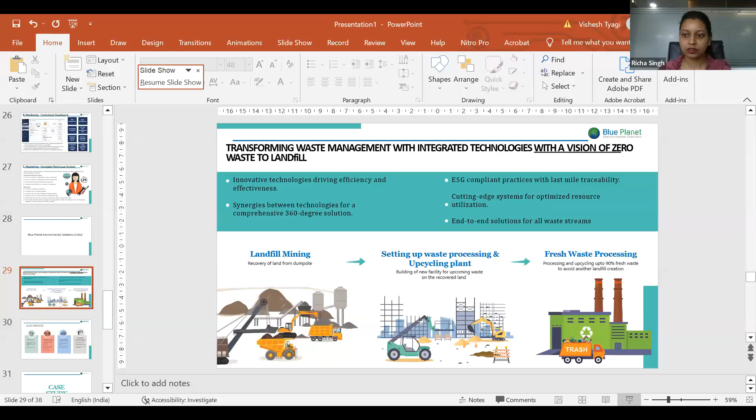So I'd like to share... is it visible? Yes. So today I would like to start with the topic of integrated waste management approach.

As we know, India as a country generates a huge amount of waste every year. According to one report, we generate around 62 million tons of waste, of which only 43 million tons is collected. The rest, around 19 million tons, is not yet collected. Of the collected waste, only around 12 million tons is processed or treated. The remainder, around 31 million tons, is simply dumped into landfills. This is the situation we face every year.

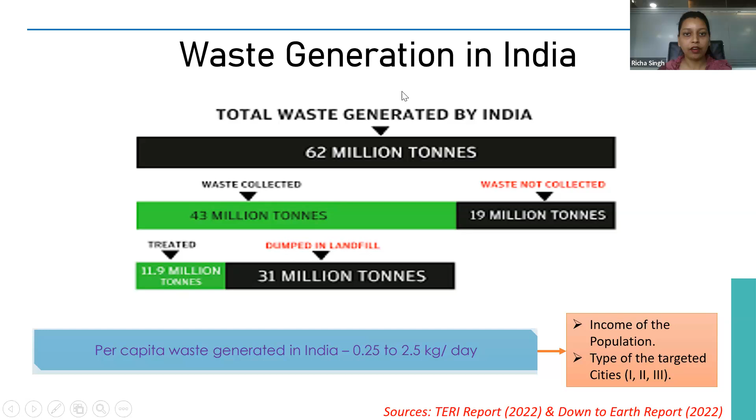According to the resources, the per capita waste generation in India is around 0.25 to 2.5 kg per day. This basically depends on the income of the targeted population or the type of targeted cities, like Tier 1, Tier 2, or Tier 3. So from here you can imagine how much waste we are generating every year, and this could be a huge problem.

The major problems we can identify here are waste collection and waste disposal. In terms of challenges in waste collection, there is a lack of participation in waste segregation at the source due to low awareness. This lack of awareness is the main cause of poor waste collection.

The second issue is the low waste collection fee—the wages we provide to collectors are very low, so they also don't participate much since awareness is not there. Collectors are also not aware of what is hazardous and how to segregate it. Other challenges include lack of infrastructure, lack of human resources, and insufficient budget for solid waste management.

There is also a limitation of suitable technologies—we are not aware of which technologies are suitable for collecting hazardous waste or different types of waste. Additionally, there is a lack of institutions and policy for solid waste management. Even though we have the Solid Waste Management Rules 2016, awareness about how to implement it is still lacking among common people.

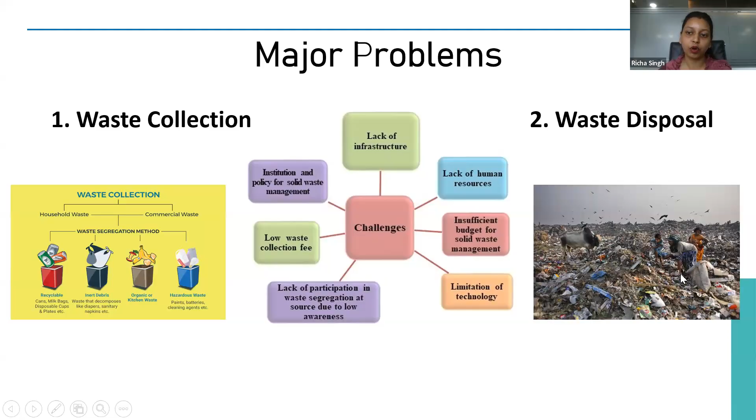So the objectives we are going to discuss today are how to reduce the adverse impact of this waste on the environment.

In both respects, how to collect it and how to dispose it, and in between, how to process it efficiently. Second objective is to consider material flow in the society. Third, reduction in solid waste quantity, how to reduce the solid waste quantity. Then reuse of material, and the last is recovery of material and energy.

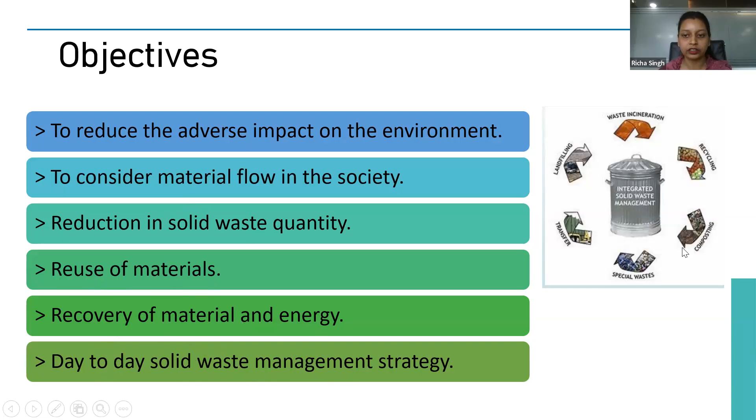Day-to-day solid waste management strategy looks at how we can make a strategy to manage our waste. Especially here I am discussing solid waste. These are the categories we can divide our solid waste into based on the material type, whether it is organic or inorganic material, or biodegradable, non-biodegradable. On the basis of material composition or type, we can segregate and categorize solid waste.

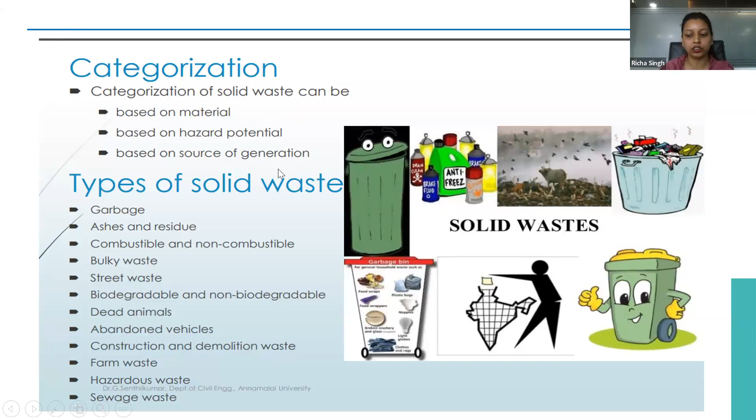Then based on the hazardous potential, we can categorize solid waste. Third is the source of generation. What is the source of generation? Here you can see the sources of solid waste: residential, commercial, industrial, municipal services, institutional, agriculture, hospital.

In the picture, you can see a huge amount of solid waste is generated from the residential part, around 68%. Commercial also contributes a huge amount, that is 14%. Municipal services, education, agriculture together contribute around 12%. Industrial waste separately is 2%. Hospitals and clinics, which come under hazardous waste, contribute around 4%.

So what we have to remember here is that the quantity, quality, and composition of waste depends on the source of waste generation.

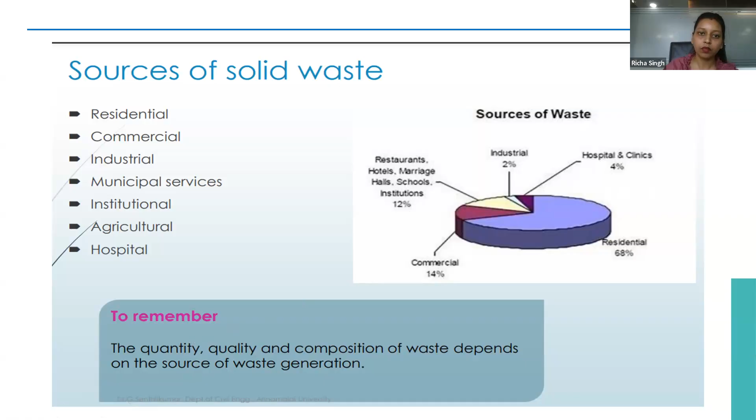The composition of municipal solid waste in typical Indian cities: here we can see the composition of MSW in India. Generally, around 40% is food or garden waste, which we can call organic waste. The major part of organic waste, food and garden waste, is 40%.

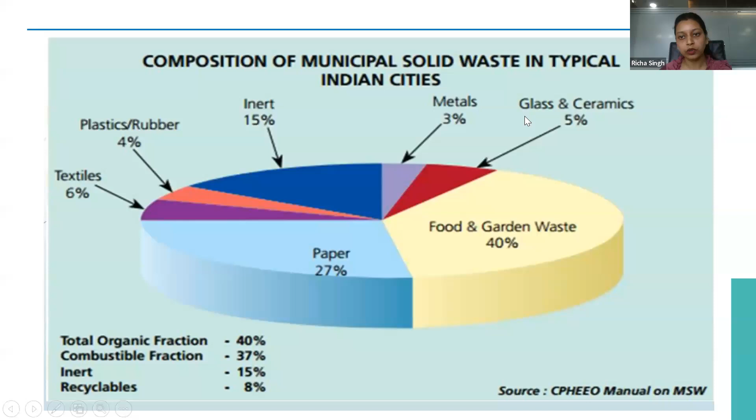So how do we utilize this with an efficient, proposed methodology? We can say the Solid Waste Management Rules 2016 released by our Government of India.

This is the basic structure of the methodology. We collect the waste from different sources. Under the second level, we segregate it according to characterization, like biodegradable, non-biodegradable, and others. Then the third level in this methodology is transportation, which is also considered a big part of this integrated waste management methodology - how to transport it.

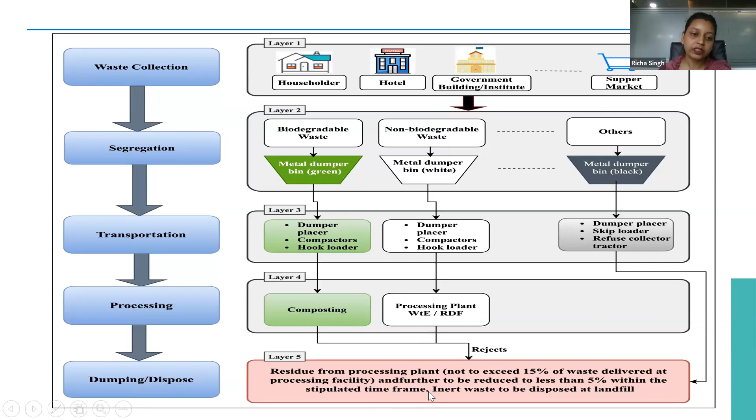Some solid waste is bigger in size, and we have to reduce it, so pre-processing is included, and transportation is made efficient at this stage itself. Then the fourth layer of methodology is processing - how to process that waste. For biodegradable waste, composting is proposed as one way. Other processing like waste-to-energy methods are also there, so we can go for that too. And then how to dump it in an efficient, scientific manner, so that it could be sustainable for our environment.

Then I will discuss each and every aspect of it, like integration, end-to-end solid waste management - how we can provide this end-to-end solution to the solid waste generated in our environment, in our society. We can see here one approach of integration in a commercial area or residential area.

The waste is always generated, we can collect it, and mechanically or manually segregate it into different types and categorize it into organic waste, some dry waste which is combustible in nature, and non-recyclable waste, which we can utilize for some process. Plastic waste is also one part of solid waste, so we can utilize it and convert it through some process into fuel. The remaining is inert waste, some part of which we can recycle and utilize for different useful products.

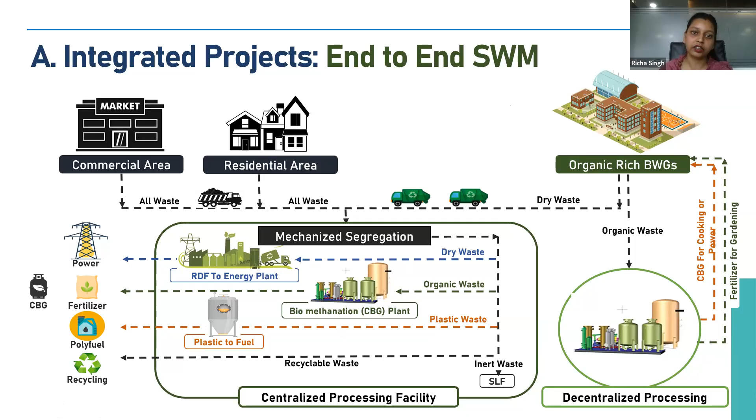The second part is integrated landfill mining. Here we can say that the collection of waste in the landfills is where we can apply this integrated waste management strategy, so we can directly turn these landfills into a good and nice place for the environment, where sustainability can exist.

If we get some landfill place, the first part of this methodology is pre-assessment and analysis of the dump site. We have to analyze and characterize this dump site: what is the composition of the waste, and what are the different types of waste we can segregate from this.

Then, how we can stabilize this waste. Here you can see this dump site is divided into several rows, which is for the aeration we provide to it, to manage the landfills accordingly.

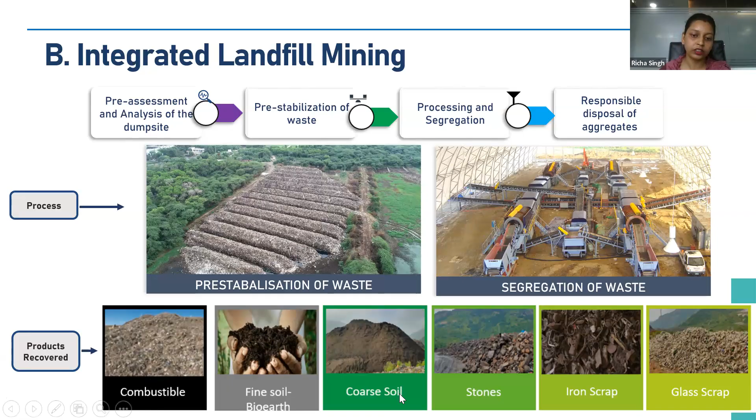Here you can see these are the processes, and here we can recover important and valuable products like combustibles, fine soil, bioearth, coarse soil, stones, iron scrap, glass scrap, etc. These are the processing technologies.

First, when we collect it, we call it a material recovery facility. After segregation, every type of material we get is segregated, and we plan the recovery of each and every resource of waste we got. So we can say it's a material recovery facility. Here you can see that organic waste, dry recyclable waste, plastic non-recyclable waste, hazardous waste, and inert waste we get, and this segregation could be manual or mechanized.

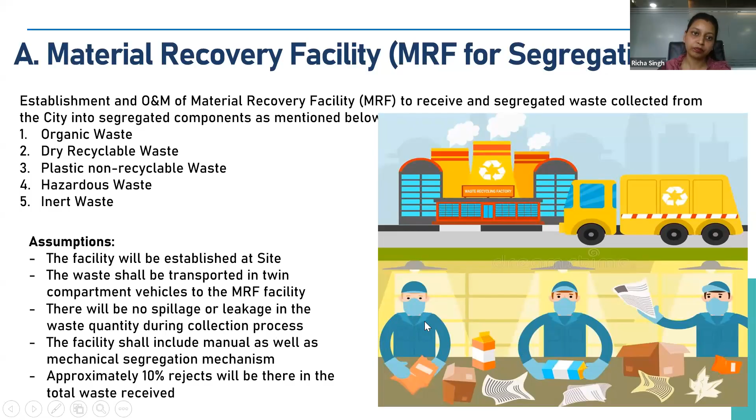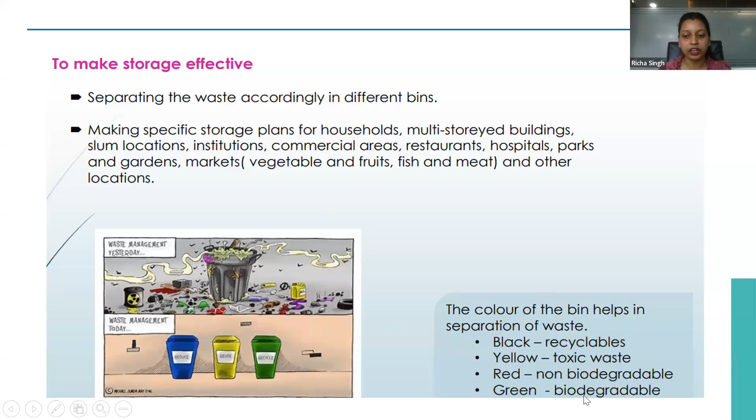As we go to a higher capacity of waste collection, we can opt for the mechanical part. These are the segregation or storage, effective storage strategies we can start. The suggested effective storage strategy is to place separate bins for different types of waste at the source. Different colors of bins can help us in separation of waste: black for recyclables, yellow for toxic waste, red for non-biodegradable, green for biodegradable.

Then, as I explained before, when we get mixed waste, what is the mechanism of processing this mixed waste and producing valuable products from it? This is the mechanism: mixed waste we segregate into organic, RDF, plastic, recycled, and inerts.

Organic, through biomethanation technology, we convert into CBG or biofertilizer. RDF, from dry waste, goes through thermochemical processes and is converted into power, and the residue of it is also utilized in different channels. I will explain that later.

Then third is plastics, which is also converted into a kind of fuel we call polyfuel, which works as a liquid fuel like gasoline and diesel. The process is thermocatalytic depolymerization, TCD. Then the fourth part of this mixed waste could be recyclable waste, which we can recycle through different processes and convert into valuable products.

Then fifth is inert, which is disposed to the SLF, sanitary landfills. The important thing here is that through these products, we can generate revenue, and this we call a circular economy, where each and every part of the waste is utilized and provides us a source of revenue generation. This is a good example of circular economy, an integrated and sustainable approach of utilizing all the waste into an opportunity.

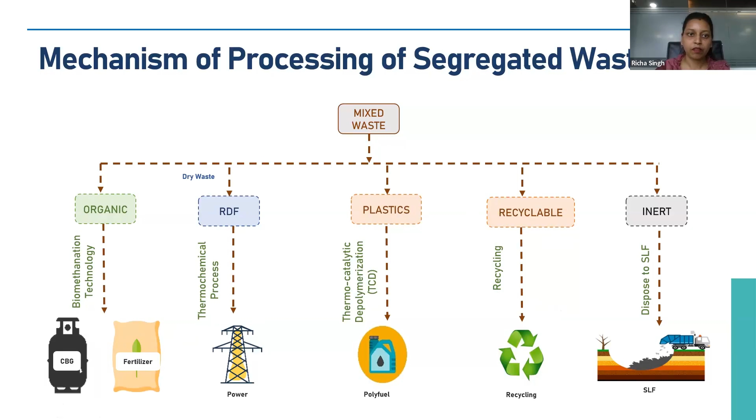So this is one example of a centralized processing facility, where we can place all the technologies I have discussed before and make it a centralized waste processing facility. Here we can utilize all types of waste using different types of technologies.

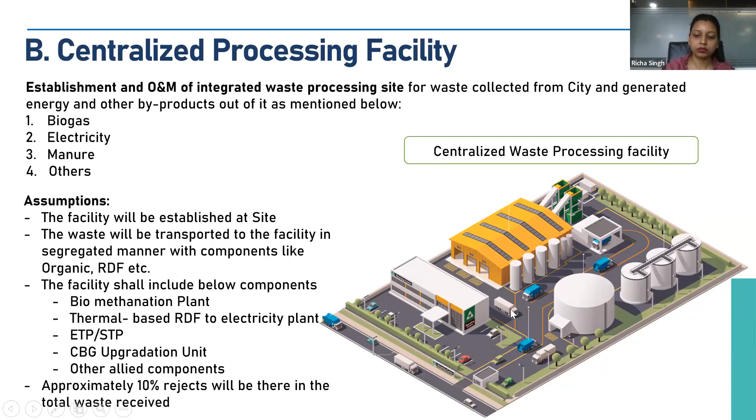As a product in several applications, like vehicular fuel, power generation, and cooking purposes. Another valuable byproduct is the digestate, which we can further process and convert into organic manure. The remaining part we can process into ETP treated water for green zones.

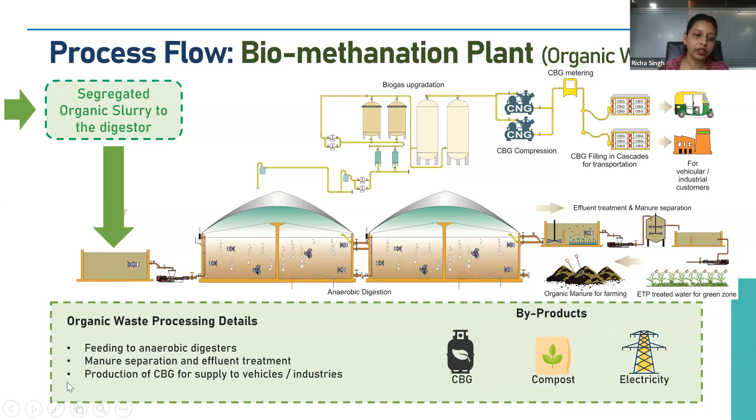So I can summarize that by feeding organic waste to the anaerobic digester, we produce valuable CBG and utilize it in several types of applications. Then there is manure separation and effluent treatment, and production of CBG for supply to vehicles and industries.

The second process is the plastic to fuel plant. Plastic is a main concern of today's generation - we are dealing with lots of plastic waste, which is very hazardous to our environment and to human health.

We can process this plastic into valuable fuels. We segregate the plastic, shred it, and feed it into the reactor, where processing happens at high temperature. It then converts into gases, which we call syngas. We can scrub it and send it back, and some oil production is also there.

Through this process, the oil we produce is called polyfuel, and we can use it as a liquid fuel, replacing petroleum fuels in the same way. This is a good utilization of non-recyclable plastic through this thermocatalytic depolymerization process.

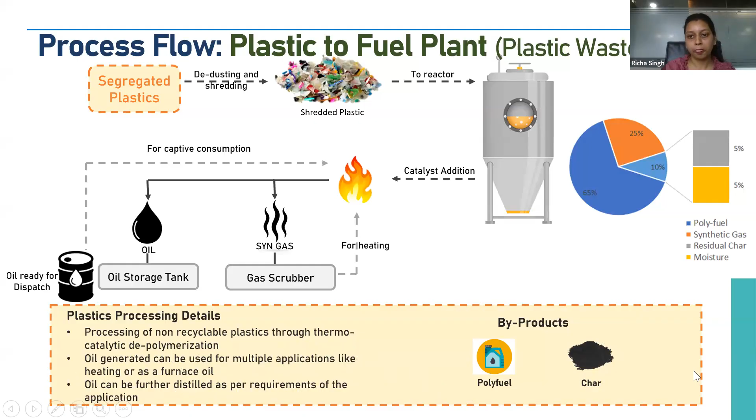Then third is the dry waste, which we can convert into RDF, refuse derived fuel, from which we can generate energy in the form of power. Here you can see the process - segregated waste is converted into RDF, and RDF fed into this furnace generates power, which we can utilize for electricity or energy generation.

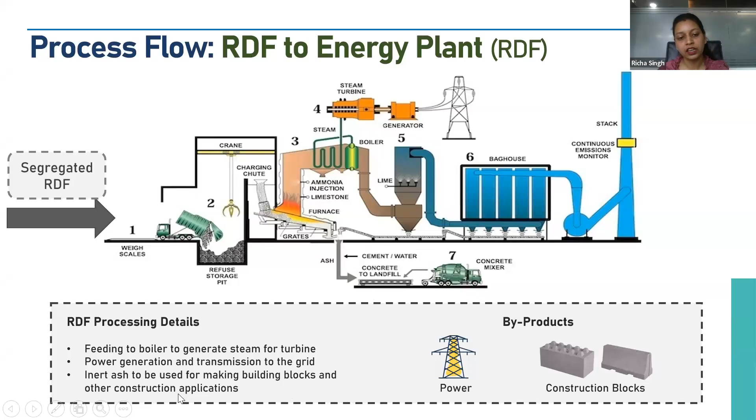The remaining byproduct of this whole process is ash, which we can utilize in construction applications. We process it and send it to cement plants, where so many construction facilities can use this byproduct of the RDF process.

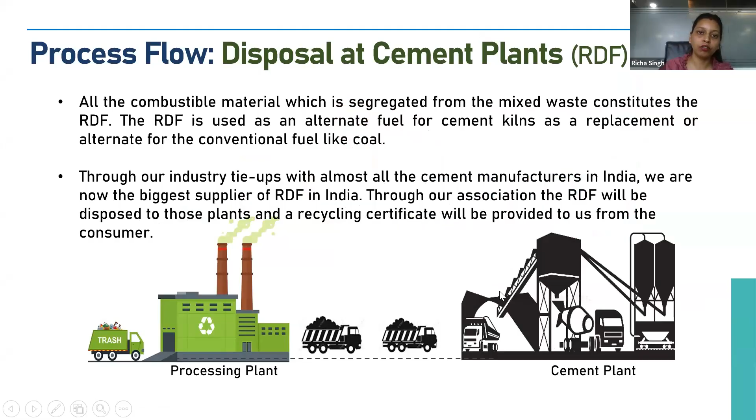Then there is recycling of the recyclable dry waste. Here you can see huge pileups of baled dry waste, which we can again utilize, recycle, and convert into valuable products.

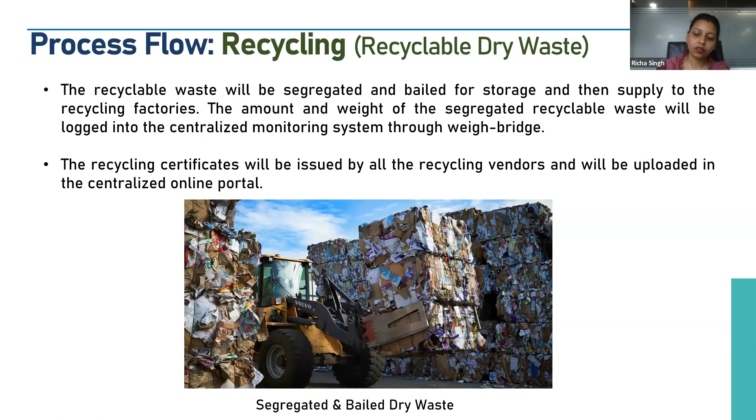For other residue management, we can go for the ETP plant or wastewater treatment plant. We can see here the structure - this is an efficient residue management option we can go for.

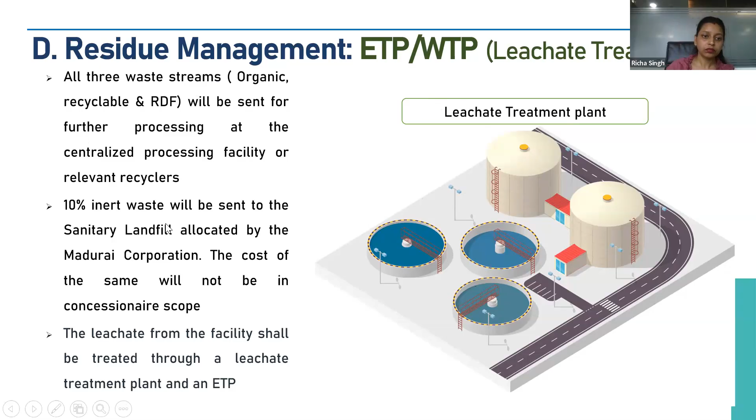The next very important part of this process is monitoring. We have to take care of this to make the whole process efficient and reliable. We can make this monitoring process online and remotely accessible - here you can see that it's automatic.

From the initial stage, when waste comes into the processing site, we need to weigh it, so we place an automatic weighing system. Then we collect that data through our online portal system, and create separate user IDs for the persons monitoring this and the organization responsible for doing that.

We can make that monitoring live through remote access and making user IDs, then we can make it traceable through the GPS tagging system, so that we can rectify each and every part of the process. Is it going smoothly, or is there any problem at every stage? We have to deal with the labor and all the manpower.

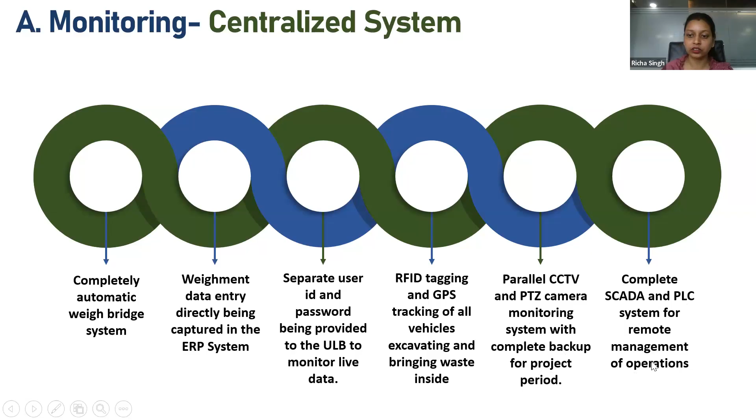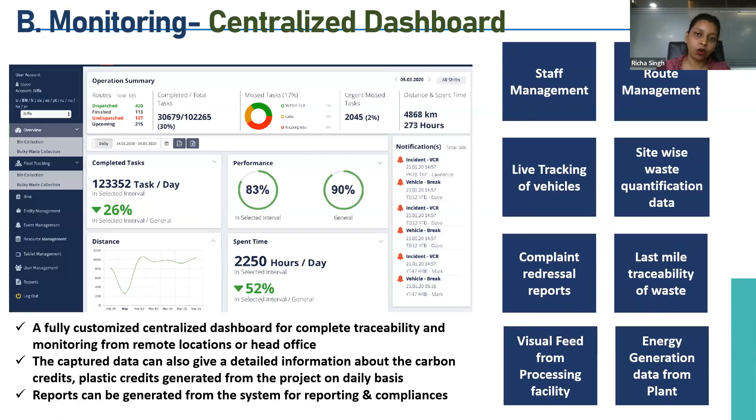The complaint system is also a major part of this monitoring system, where we can report on the number of complaints lodged on a daily basis, report on the number of complaints resolved and pending, ward or supervisor-wise complaint pending reports, and feedback reports which are to be given to the complainant.

So we can start one mobile app also, so that each and every issue will be traceable. Administrator or MC can see some part of the operation reports through the mobile app also. Photos we can upload, and we can trace all the things from there.

Then I would like to show some glimpses of Blue Planet in that terms, what it is doing. Here you can see the transformation - we are the one company which is looking for the zero waste approach in managing waste management with this integrated technology approach.

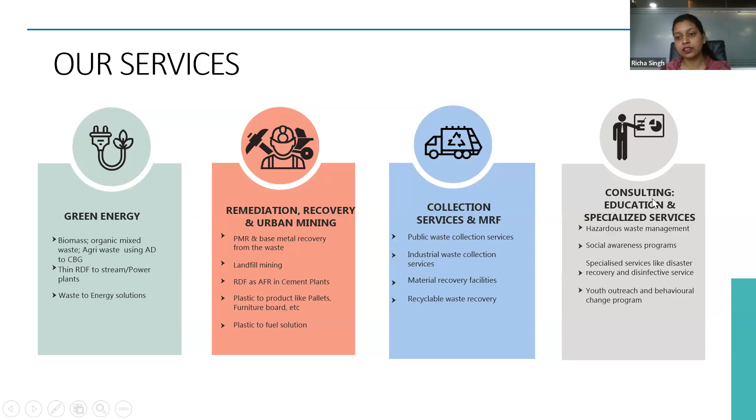Likewise, the third is collection services and MRF. Here we also do the collection services, and we do the material recovery facilities. Then the fourth, last one, is consulting, education, and specialized services also we provide.

This waste management system can divert 7,000 to 10,000 tons of waste per annum from going to landfill. We are now planning to deploy a scaled up version of the same mechanism in Kerala.

This expanded approach has the potential to divert an impressive amount of waste, ranging from 70,000 to 100,000 tons annually, from ending up in landfill.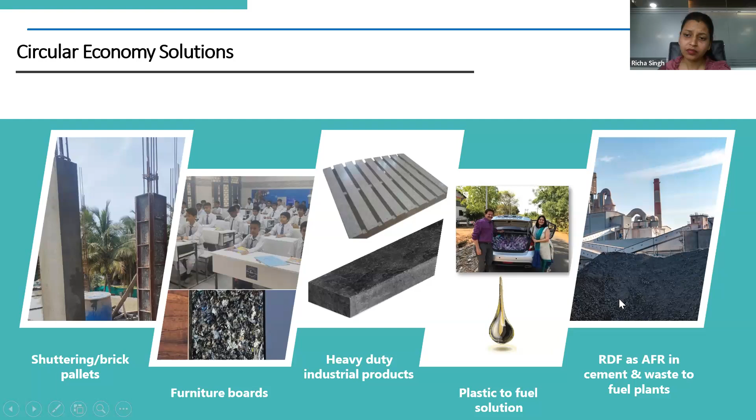This is a circular economy example, how different types of waste we convert into useful products. From plastic waste, we shred and compress it and convert it into beautiful furniture which is utilized in schools. The bricks and pallets, the construction debris, we convert into brick pallets which we can utilize for construction purposes again. Heavy duty industrial products we convert into these kinds of products, then plastic to fuel, from which we can run vehicles or run the industry. The energy, and then RDF. The ash we send to cement industries, where again it will be utilized as a useful product.

So these are some decentralized organic waste solutions where you get a compact modular product with customization, more than 120 plants delivered, in-house designing and R&D by a technical team with global expertise, equipped with an online monitoring system and global standard components.

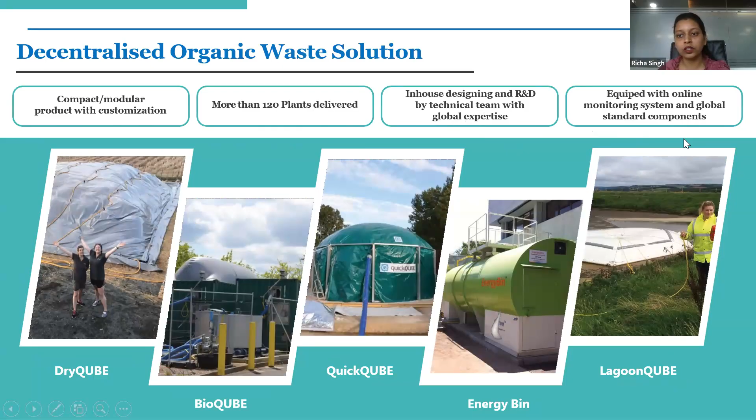So these are the achievements, a few of our achievements.

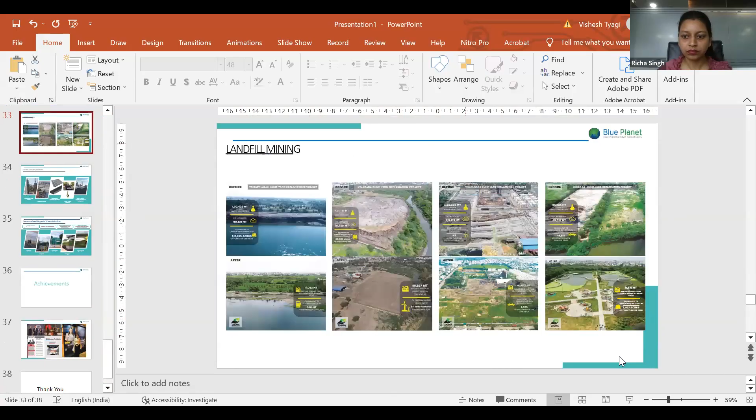But this biomining in Ghazipur, are you also involved in biomining landfills there? No ma'am, Ghazipur we didn't approach, but Noida we approached, in the northern part. Okay, so what was the landfill size in Noida? Huge, here you can see. Can you see the screen ma'am? Yeah of course, not full, but yeah.

So here we processed around 99,665 metric tons of legacy waste. You processed it, and then what did you do, took it into a biogas plant? It's like, because legacy waste consists of organic waste as well as other types of waste, organic waste is one part, and other parts like RDF we are also doing, and then recycling is also one part of it. So our approach is integrated in terms of managing all types of waste, not only organic, all types of waste.

Yeah, so there are certain comments and some queries also. First, from Ashwarya: most of the waste actually goes to dump sites due to lack of sanitary landfills, which are required to be in compliance with the Solid Waste Management Rules 2016. So would you like to comment on this?

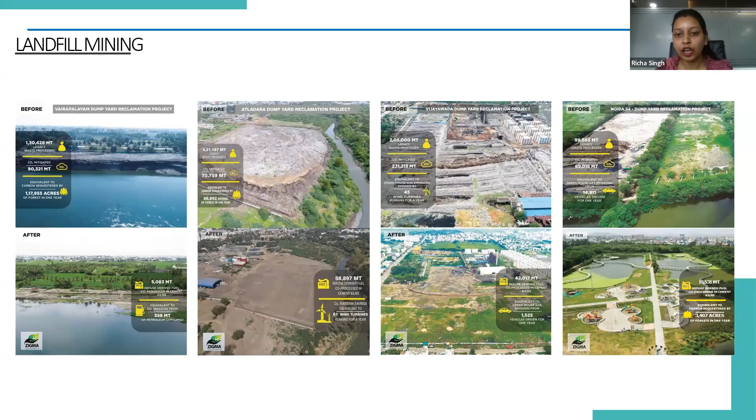I think we don't have any landfills, we don't have any space for landfills. So yes, that's why this integrated approach should come into the picture. We already started that approach, and there is a scientific engineering way to dump this inert waste, or we can say sanitary landfill. There is a scientific approach to do that, I can show some pictures. You have to mine it. Here you can see how we cover it so that leakage should not be there. If we dump in an unscientific way, we are again polluting it. So we should think about it, and there are proven technologies to dump it in a scientific way. So that approach we have to do, and awareness of it is a must. Yes.

Pre-dumping also, you line it up and you don't allow the leaching to the soil, no water, the toxins going into the soil. I think you make a bed and all, then only you do it for the pre-landfill.

You have shown one slide now. Yes, the second is from Mr. Royston. He says he thinks the system will work wonders if we can create awareness and segregation happens at source. Yes, true, agree with that. So much effort is being made in RWA also. We can't give mixed waste, we have to segregate wet and dry waste. There's a fine - he takes a photograph and puts a fine on us, 500 rupees for everything.

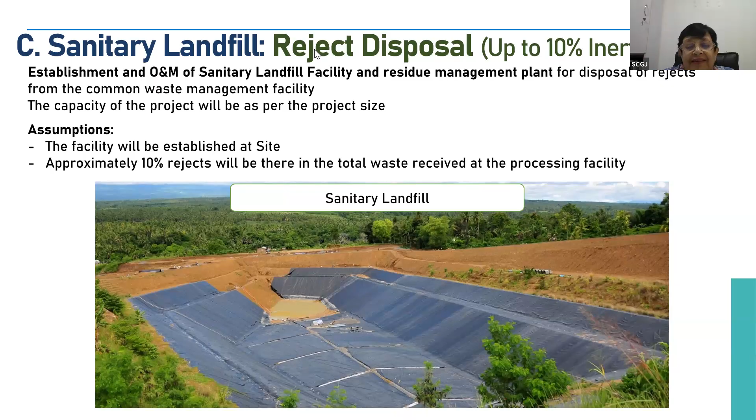I think it was a wonderful presentation. The integrated approach was very inclusive. It gave everything into, and the biomining concept, that is very important.

It has come up lately, but I don't know how many years it will take to come down, the Ghazipur landfill. There are so many issues related to that because municipalities are involved, so it's very difficult.

I have been to that landfill, and even standing close to it was difficult, because there were some projects which were coming up for processing it. There's a local global warming happening around the landfill, and I think how people are living there, it's very difficult. The earlier it is done the better, and then there are the fires which happen, the disease, and the general immunity of the people living close by goes down.

I think in urban areas, that's the main issue with dealing with this. We don't have lands and we are filling it with waste. That too is creating so much of a problem. So we have to deal with that in a scientific way.